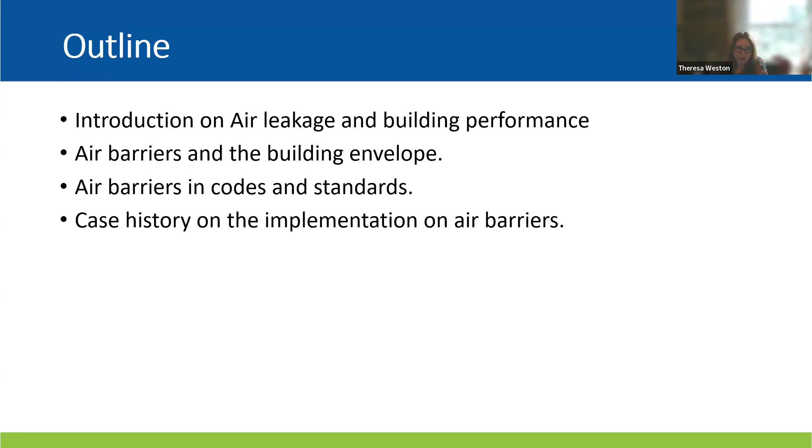Anyway, so what is air leakage? Air leakage is the unplanned, unpredictable, and unintentional airflow through, into, or out of a building. And for it to happen, it needs two things. It needs a driving force, so there needs to be a pressure difference across the building, and it needs to be a pathway. And in this case, we're talking about an unintended opening. The difference between air leakage and ventilation, say, is ventilation is planned. You are doing it for a purpose, and you're trying to control it. Air leakage is happening, and it may not be happening, or is most likely to be happening when you don't want it to happen.

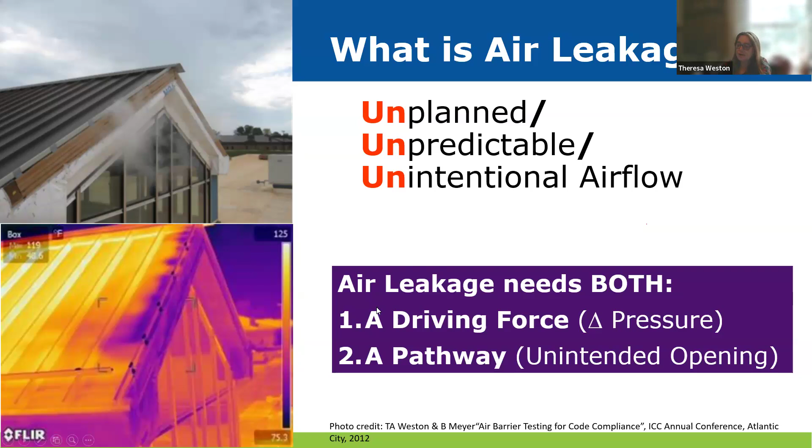And so I'll talk first about the driving forces. There are three driving forces on buildings that are the primary sources of the air pressure difference, which can drive air leakage into a building. There's wind pressure, and the size and shape of the building do control much of what the actual pressure is on a building, and you get both inward and outward pressure differences on the building, depending on how the building is exposed to the direction of

the wind. Then there is stack pressure, which is basically based on the building height and is the natural convection forces and the pressure differences from natural convection. And then mechanical pressure, which can be, again, a negative or a positive pressure on the interior of the building, and can cause air leakage to occur either inward, infiltration, or outward, which we call exfiltration, through a building envelope.

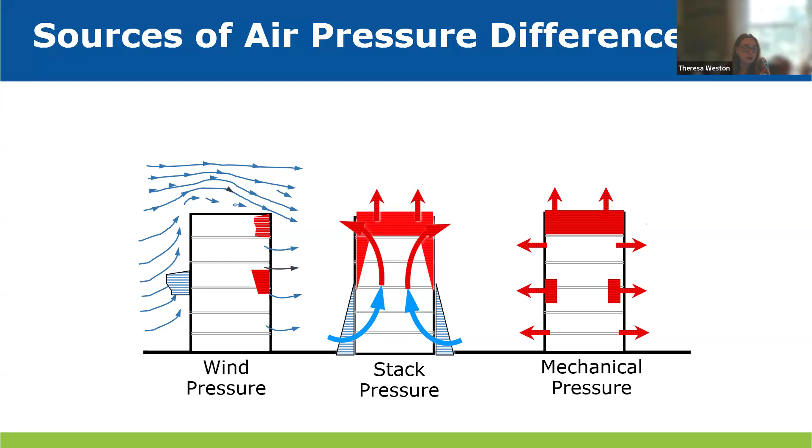And these three pressure differences can work together to cause a pressure profile across a building envelope at different places, and they can all cause air leakage, which can be unwanted, and I'll talk about what some of the consequences of that are. But before I do that, I just want to give you an idea of what the level of pressure difference is that you get from air pressure. From wind pressure, this is actually looking at the pressure versus wind speed. You can see it's not linear, but obviously when the wind speed goes up, the pressure differential goes up. Usually you're at a lower wind speed than what the testing is at.

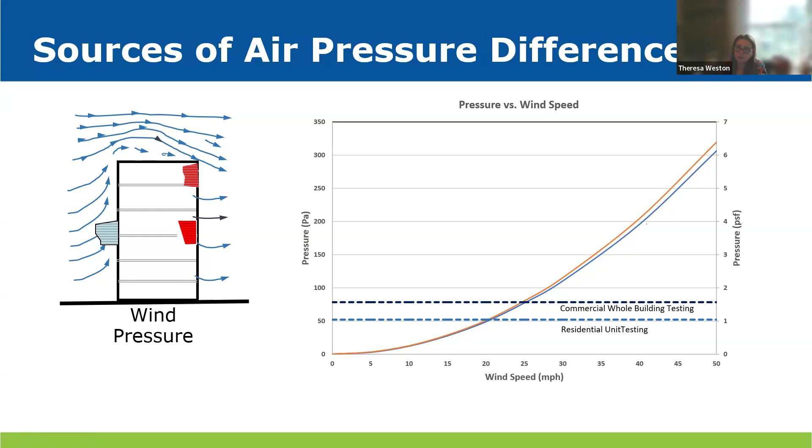Commercial whole building testing is usually done at a 75 Pascal pressure difference. And I will be talking more about how you do the testing later in the talk. And residential unit testing, where you're looking at testing an individual unit within a multifamily building, is usually done at 50 Pascals. And those have been just developed traditionally, and that is where we tended to get the most repeatable practical testing. Those are higher than the pressures that we actually see day to day on a building, but they are done to characterize the leakage within buildings.

If we look at stack pressure, I'm not going to go through the details of the equation, but just to know that the taller the building and the larger the difference between the interior temperature and the exterior temperature, the more stack pressure there will be. So if you're in a high-rise building in a cold climate, I know there's been a lot of studies on stack pressure effects on, say, high-rise buildings in Canada, where they have quite cold winters. You'll see a larger effect of this stack pressure than, say, if you're at the equator, where the inside and outside temperature are not that much different. And then it does matter on the height of the building.

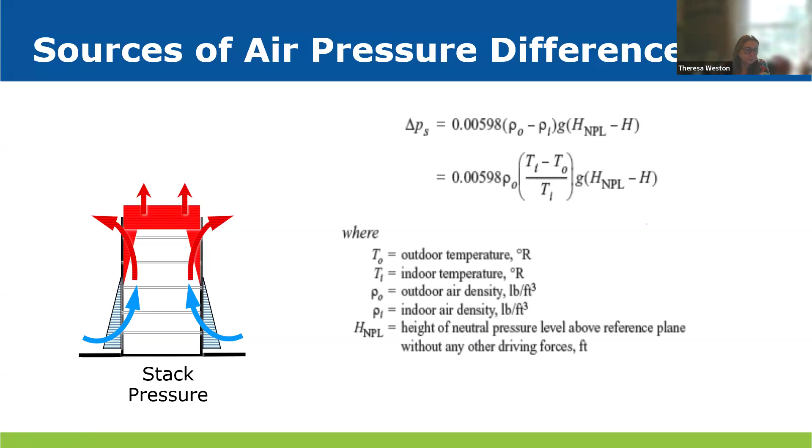And finally, mechanical pressure. Now, mechanical pressure is caused by mechanical systems that are not balanced, so that you're creating either a negative pressure or a positive pressure inside the building. And they can be quite extreme. It depends on the equipment and how you're running it, how well it's commissioned, how well it's working in there. This is some work that I did on a manufactured house. So these are small. It's a very small single family house building.

And what we did is we looked at the pressure difference from the interior to the exterior with a number of different mechanical devices in the house turned on, and all of these exhausted to the exterior. As those exhausted to the exterior, they depressurize the house inside. So with nothing on, we're close to zero pressure across the building. But then when we turned on the furnace, we went up, we turned on the range hood. This is the exhaust hood above a cooktop. Then we turned on an exhaust in the bathroom.

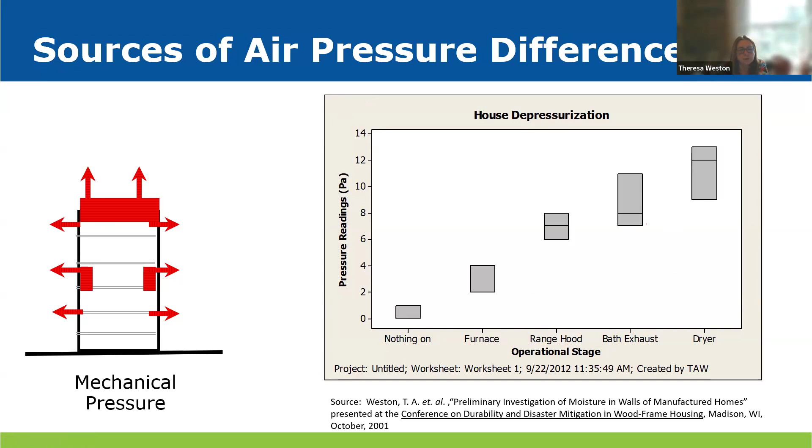So going now to the impact of air leakage in a building. So air, when it leaks, it transports heat. So obviously the air has a certain temperature and it is moving, so it's transporting heat. It also will contain a certain amount of moisture and will transport moisture, and then it may also contain contaminants, and so it may move contaminants with it.

And so when we look at the impact on the buildings, the heat will cause, we usually look at the air transport for heat and its impact in terms of the energy efficiency of the building or the load on the building to condition the interior, but it may also affect the comfort. We look at moisture and its movement.

We primarily look at if there's moisture in the air and it hits a cold surface, it can condense and cause moisture problems in the building and reduce the durability. But obviously, moisture moving into the building can also cause some issues with comfort and with energy efficiency. And I'll have some examples to do that. And then, of course, if you're moving contaminants into a building, it affects the indoor environmental quality of that building.

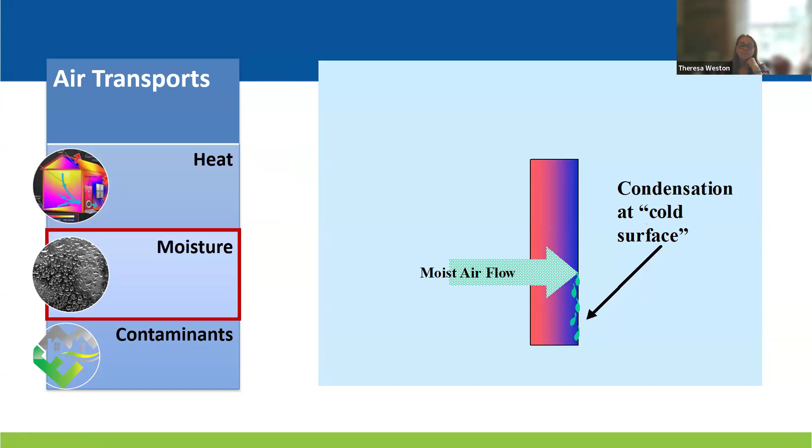And so although we spend a lot of time in codes trying to control things through vapor barriers and reducing vapor diffusion, if you don't consider the air leakage along with that, you are hurting yourself, because the air leakage just bypasses the diffusion barrier. So you need to consider the air leakage as well as the vapor diffusion when you are looking at moisture transported through a building assembly.

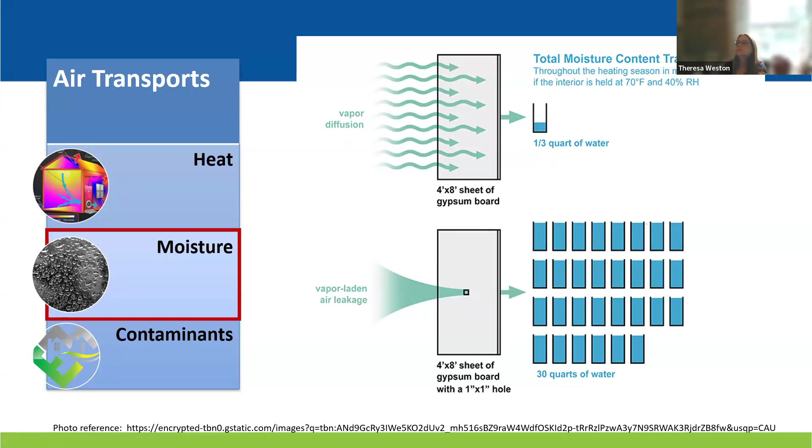And when you have air conditioning on the inside and hot, humid weather, you can move moisture through. It can hit a cold surface, and then it condenses, and once it condenses, it can cause things from rot in wood surfaces, to mold. It can cause corrosion in metal surfaces, a number of other harms, and hurt the durability of the building.

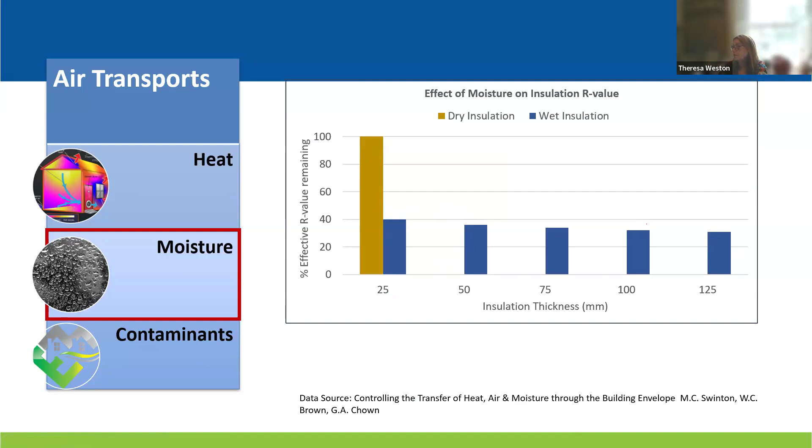Also, if that moisture were to go into your insulation and condense in the insulation, you reduce the insulation value because wet insulation does not work as well as dry insulation. Having more insulation when it's wet doesn't help you versus a good dry insulation. So you want to avoid moisture condensing within an insulation area as well, because that'll hurt the energy efficiency of that building.

Finally, if we look at contaminants, one of the areas where we've looked at it in North America is at the garage house interface.

And this would be the same if you had a residential building over a commercial space. Depending on what was in that commercial space, you may want to separate and stop the air movement from that commercial space into the residence, and keep the air quality separate between the two. We're also seeing a number of resilience issues.

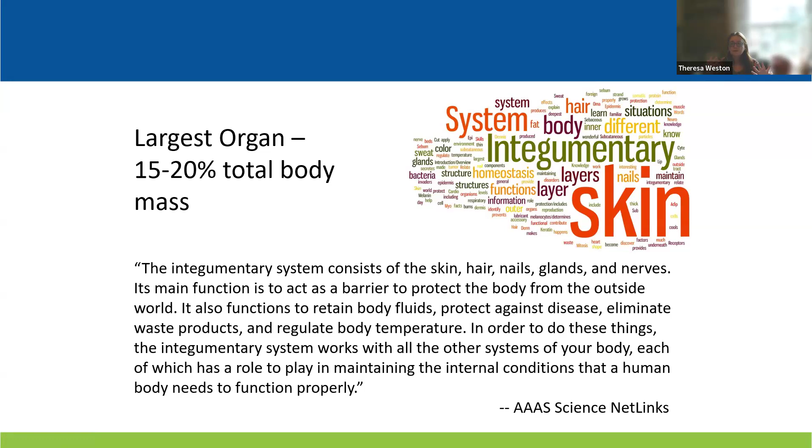And so we talk about this building thermal envelope, and air leakage is a critical part of establishing that thermal envelope or enclosure. It's analogous to the largest organ in the human body, the integumentary system. I always have trouble saying that word, which is basically all of the skin. And that's like 15 to 20% of your total body mass. Really, the building envelope is providing the same benefit to buildings that this system provides to the human body.

When you are establishing these enclosure systems, I do want to say that there's a lot of balancing that goes on, because the building envelope has a lot of characteristics and performance requirements that it has to meet. So we talk about energy efficiency, but it also has to be constructible. It needs to be able to be done on site effectively. We do need to handle water management, both in the liquid form from rain and vapor diffusion.

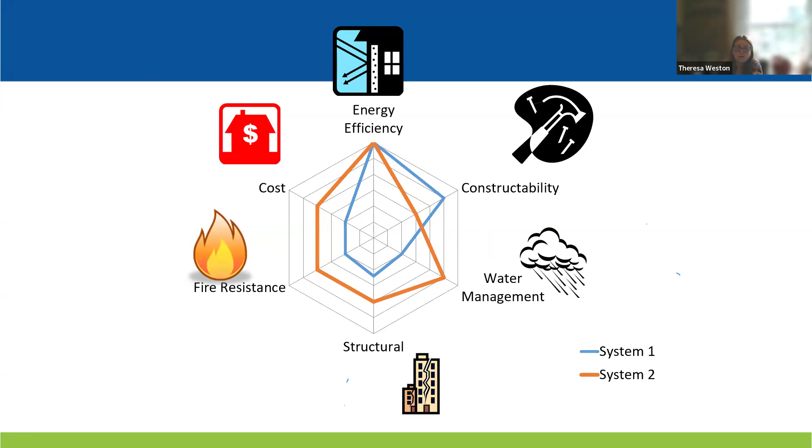And so you may get two systems that have equal energy efficiency, but they may be different in some of these other aspects. So you need to look holistically at your design, but air leakage is always a part of that design. And so we want to look a little bit closer at where air leakage occurs.

And sometimes when we specify a sheet material, we don't realize that the seams in the sheet can let air leakage go through. It is harder to see the air leakage going through materials themselves, but with things like fiberglass or rock wool insulation, air leakage will go through there. They're porous materials, so you will get air transfer through there if they are not built adjacent to an air barrier.

This is a materials test where a square meter of material is laid, a pressure differential is put across it, and the amount of flow across at a given pressure differential is measured. An assembly, whether it be a wall or a roof assembly, is tested pretty much the same as the material, except we actually build it to scale.

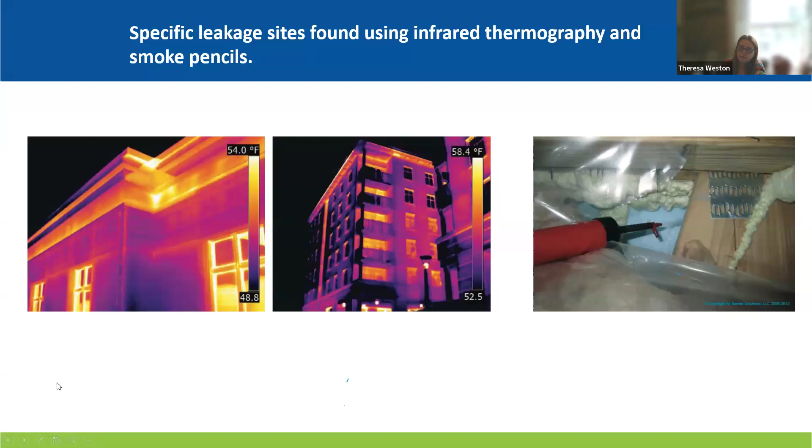If you want to find out more about these, there is e-learning available through ASTM on a number of the test methods mentioned. I think there's a cost included in it, so I'm not trying to do a commercial for it, but there are also some YouTube videos available to see how these programs actually work.

So I'm going to quickly go through where we have air leakage in codes and standards. Air leakage is not uniformly considered in all codes and standards, although it has effects on durability, energy efficiency, and indoor air quality. It is not included uniformly across codes and standards.

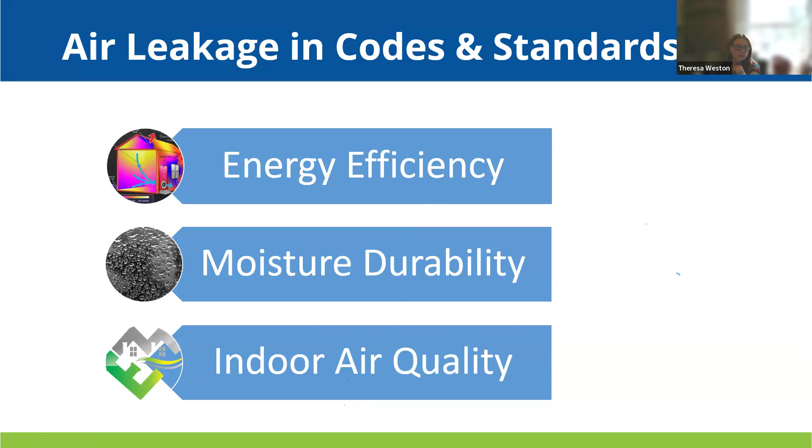So when you look at energy efficiency, air leakage is included in the Energy Conservation Code, IECC, and ASHRAE 90.1, as well as in ASHRAE 90.2 and ASHRAE 189.1, which is the technical content for the International Green Construction Code. This is where air barriers and air leakage requirements are the most evident. So we put a lot of time and personal energy into the development of the 90.1 and the IECC requirements, because that is where it is most regulated, and this is within the U.S.

codes. In Canada, air leakage was actually regulated for moisture before it was regulated for energy efficiency. So this is somewhat of a country-specific requirement. In moisture, within the ASHRAE codes, we do consider it as part of moisture durability, and the requirements are within ASHRAE 189.1. We actually have one requirement, but it affects energy efficiency and moisture durability, and it also affects indoor air quality. And then there are some areas about air leakage considered within ASHRAE 62.1 and 62.2, both minimums and maximums within those for good air quality.

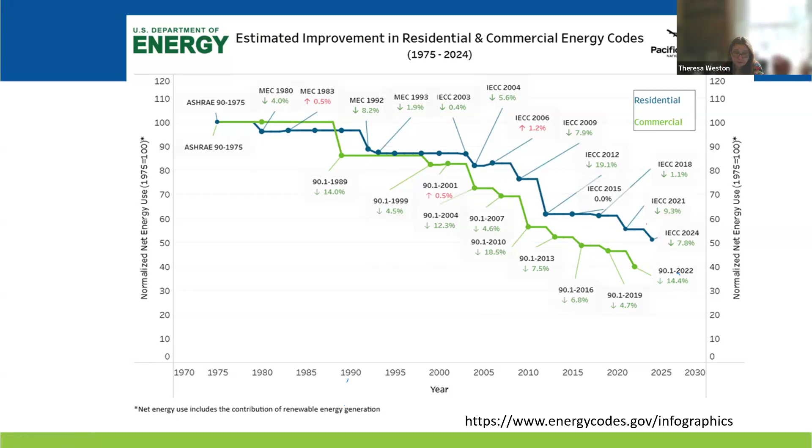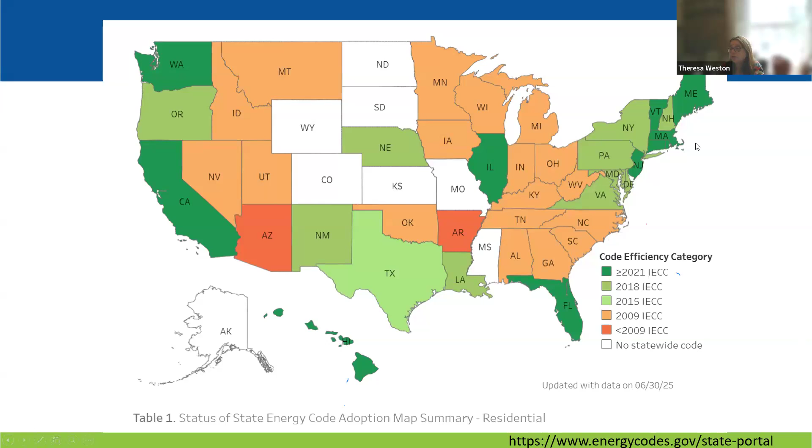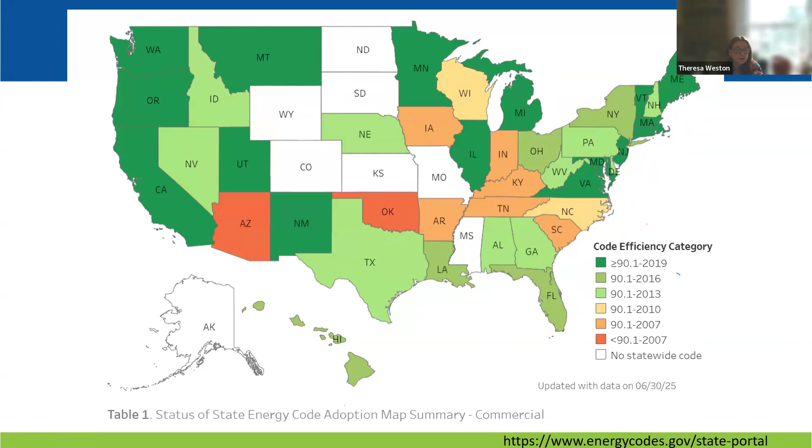So you can see from year to year, edition to edition, you get a different level of efficiency. And this is where code adoption comes in. This is our residential code adoption. And you can see that within the US, different states adopt at different rates, and the same is true for commercial. So we do have wide-ranging regional differences in what our requirements are based on state, because of what they've adopted or adopted with amendments within the US. But all of them, when they get to the field, need to be implemented. We actually need to implement in the field. And so how do we do that?

How do we implement the air leakage code compliance, which is, of course, part of the building envelope code compliance? We have a maximum air leakage allowable with a whole building air test. That's one way that we look at compliance. That has been a fairly recent introduction into the codes. We do verification of tested materials and assemblies, and then verification to make sure they're installed correctly. Whole building air testing, and then with the advent in the most recent codes of adding energy credits.

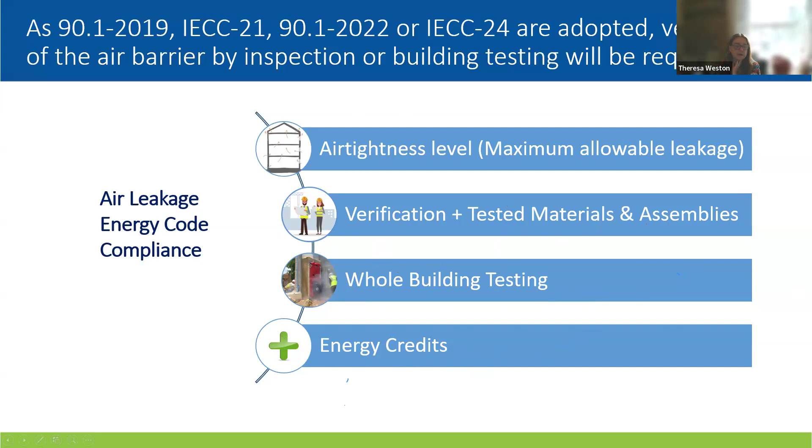So you have to meet a baseline prescriptive and then get a certain number of credits, where you get to pick from a table the number of credits that you want. Getting air leakage into those energy credits actually aids you in doing whole building testing, looking at the air tightness level and trying to improve it. So what are the code requirements? I'm going to go through this fairly quickly because these are the US code requirements.

As I said, ASHRAE 90.1 is a federal minimum, but we also have an International Energy Conservation Code, commercial section, which follows 90.1. So they are in pairs. They're not exactly the same, but they're in pairs. A lot of states will adopt the International Energy Conservation Code, and as long as it is at least equivalent to the current version of 90.1, it will meet our federal requirements.

Residential is the residential part of the Energy Conservation Code, and by residential in this case, I mean single-family dwellings and duplexes, 3 stories. So these are small. Any large residential, any multi-family apartment buildings, condominium buildings, etc., would be under the commercial code. And depending on your building profile within a country, most of your residential might actually end up being in the commercial code. So I'm going to just go through.

As I said, they're paired. So the ASHRAE 2016 is included as part of the IECC 2018, 2 years later. These are just a series of charts showing how this has advanced over the last 10 years. I'll just highlight a few of these things.

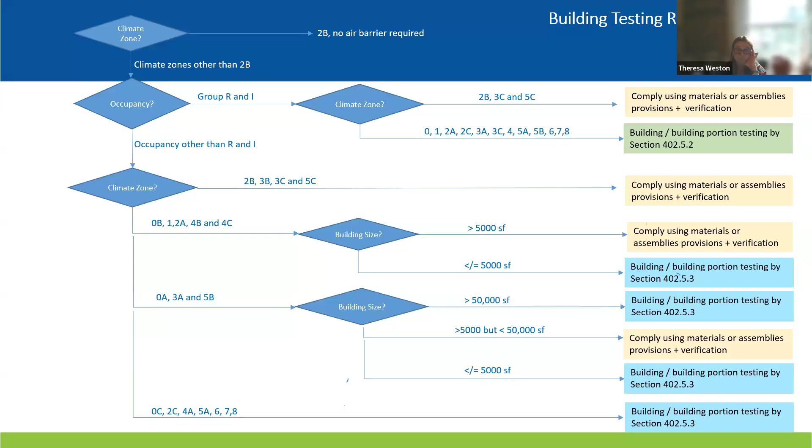This is actually not quite as complicated as it looks for a given jurisdiction, because in a given jurisdiction, you're only in one of the climate zones. For a given state, you're at the most maybe 2 or 3 climate zones. So it does compress down as you look at it more locally, but we have a wide range of climate zones across the United States. So it was fairly complicated when you had to look at the whole United States.

The most recent 2022, although ASHRAE 90.1 will be releasing 2025 this year, did require whole building testing on buildings less than 5,000 square feet. The IECC 2024 parallel code again allowed multifamily buildings to test by dwelling unit, but it also had different whole building testing requirements, with a much more simplified climate zone and square footage requirement. And then 2024 also had energy credits for air leakage, for enhanced air tightness.

ASHRAE 90.1 2022 does not, but I sit on 90.1, and as I look into the future and the latest, we will have some energy credits for enhanced air tightness in the 2025 standard, I believe. It's not final yet, but I believe they are going to be in.

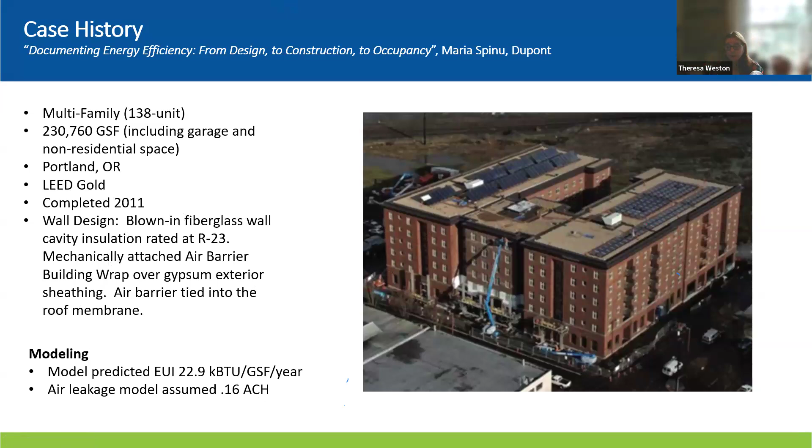They had the design of the building envelope. Again, we talked about reducing the load on the building in the beginning of this talk, by building a good envelope and considering the air barrier and the interconnections in there. Then it's really important, and one of the keys to this being a successful case history was the involvement of manufacturers in the design and construction team doing mock-up wall testing to make sure the detailing was done correctly.

I mentioned air leakage can occur through a material, but it can also occur in an assembly or between assemblies. And so making sure that the interface transitions and penetrations were taken care of appropriately, and mock-up wall testing is one of the best ways of doing that. And so that was done to get that correctly.

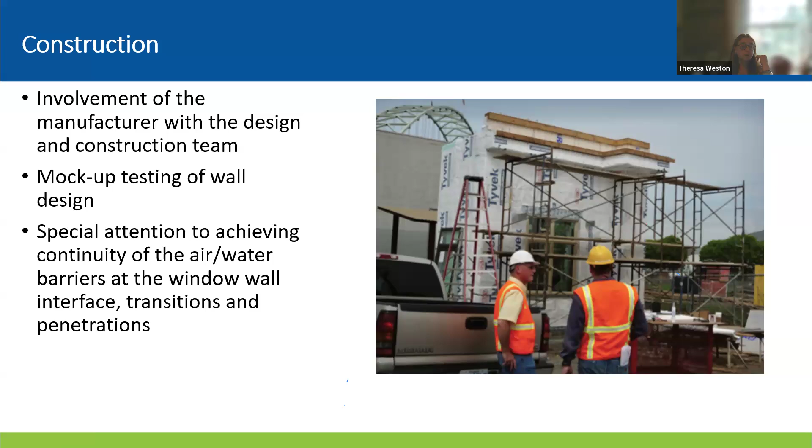And when they did the post-construction testing, they got to 0.22 CFM, which is significantly less than that 0.40, which was what was sort of in the codes at the point this was built. They got 0.14 air changes per hour infiltration rate on the units they sampled separately from the whole building air leakage. It was tested as part of an ASHRAE research project. And when they did post-occupancy evaluation, the EUI actually came in less than the modeled.

So it was about doing the design with an energy efficient loading, and using energy efficient mechanical systems, but also doing that construction verification during the construction, making sure that you had involvement in understanding the design of the interfaces as well as the construction of the interfaces. So I think I've reached pretty much the end of my time with you.

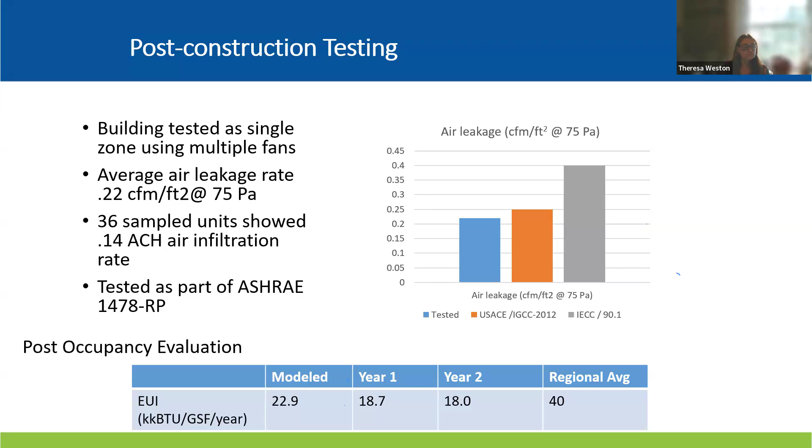So just to summarize, air leakage is unplanned, unpredictable, and unintentional airflow. Air leakage can transport heat, moisture, and contaminants, and therefore affects the indoor environment and the loads on the building. And the primary codes regulating air leakage are energy codes. They're ASHRAE 189, ASHRAE 90.1 in the US, IECC, or other energy codes in other countries, obviously.

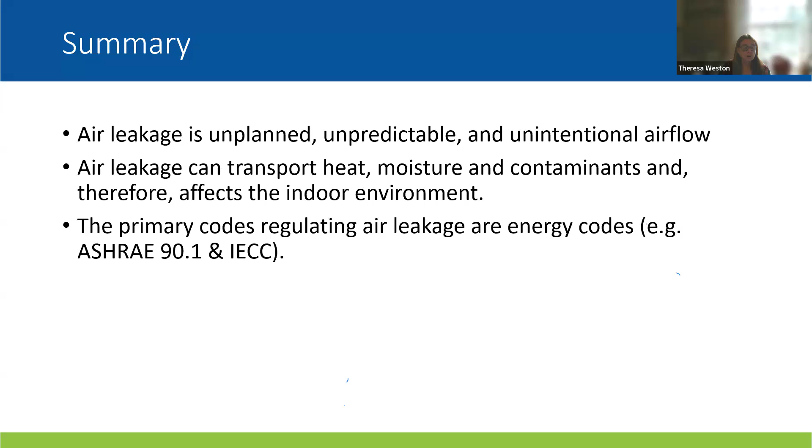And just some final thoughts. The building envelope or the building enclosure is a critical system to building performance. There are interactions between air leakage and mechanical systems performance. So air leakage sort of bypasses some of your mechanical systems. So it's really important to understand that and how mechanical systems can actually cause more air leakage as well.

Energy standards and codes are continually improving, and continuing to stay up with the most recent version is really necessary if you want to move forward with energy standards. And verification is one of the key things in actually achieving the performance that you've designed.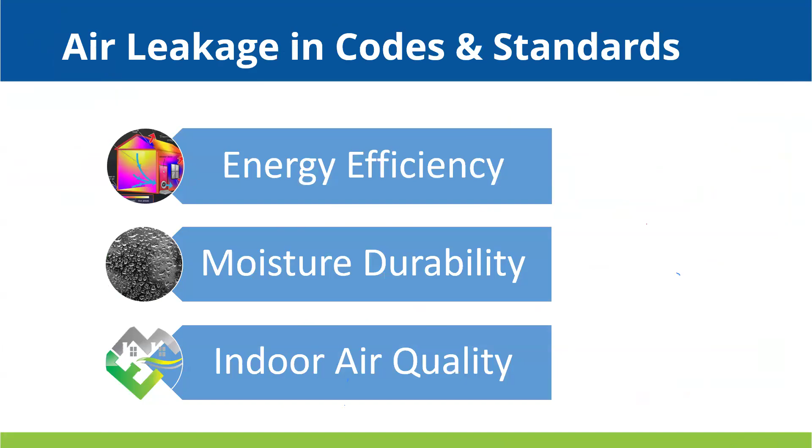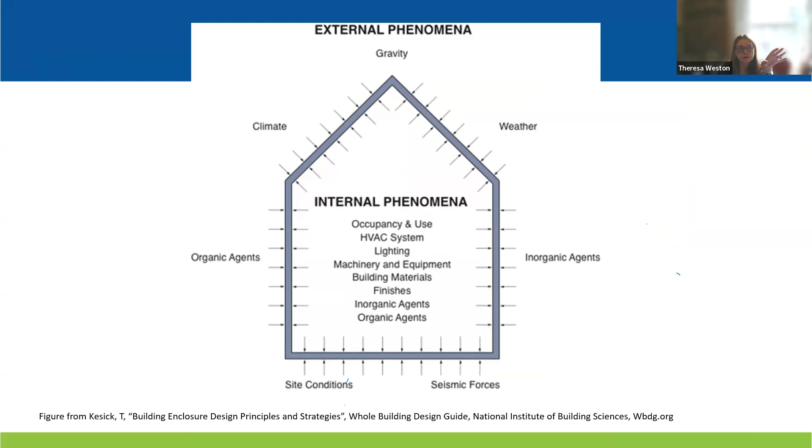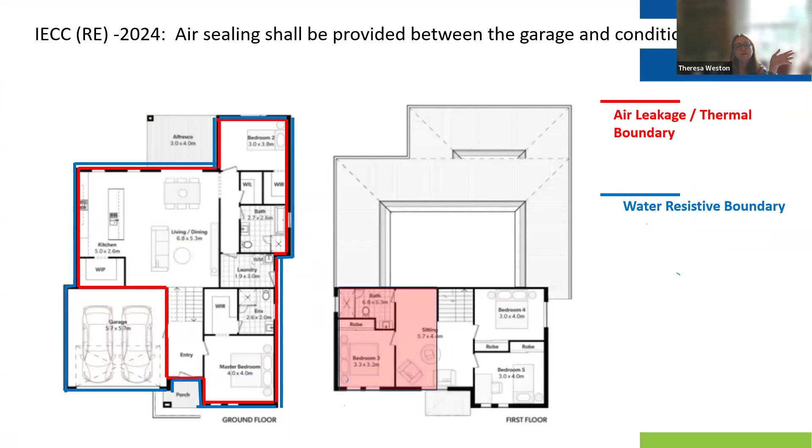While I'm doing this, I will say that I have heard of certain rooms, like clean rooms, keeping a positive pressure, so that you have parts of a building, a laboratory space or something, keeping a positive pressure, or doing a pressure differential to make sure that nothing comes into a special use room. So I think that people have done that. It's sort of a caveat to my previous answer.

The cities are regions, and when you give this in the U.S., everybody knows where they are. Miami is very hot and humid. It's down at the tip of Florida, south. Phoenix is hot, dry. That's desert. St. Louis is in the middle of the country, and it has hot, humid summers and fairly cold, wet winters. It's actually not a particularly pleasant combination.

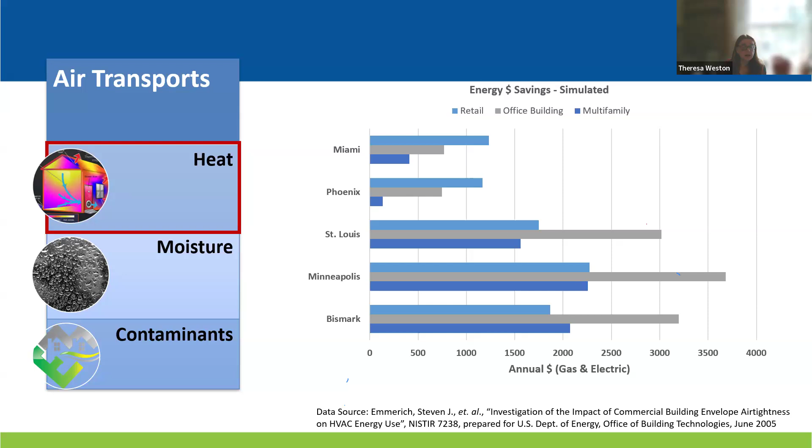A question will be from Mr. Moinuddin again. One more question regarding the sliding doors, awning windows, or some other glazing. What is the minimum air leakage value that should be considered? Oh, on a sliding door. I don't know if I have that in here.

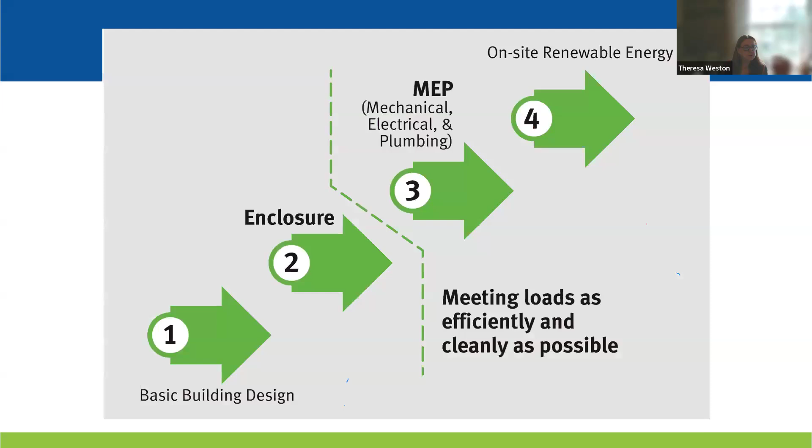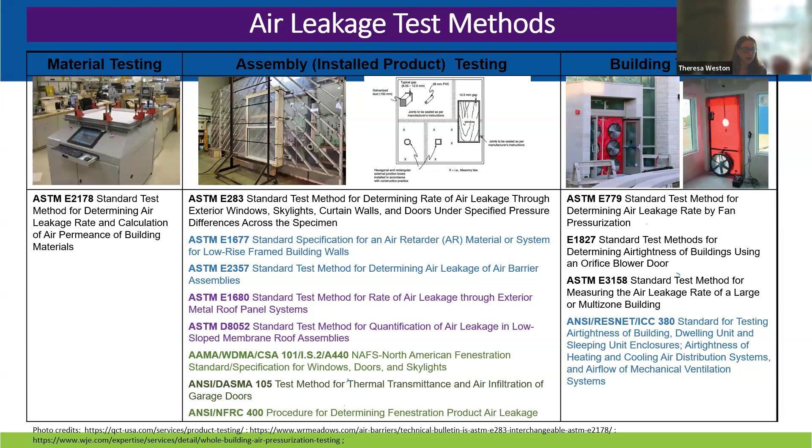There are requirements. Sliding doors, as with any other fenestration, are tested under these test methods. The DASMA is a door method. AAMA/WDMA is like a sliding door, glass door test method, and there are specific requirements in different codes for those assemblies, and I would need to bring them up, but there's actually a very direct table where you can look at that within the codes, and I can get back to you on that if you want to send me an email to ask what that is. I don't have it in my slides, and I don't have it memorized.

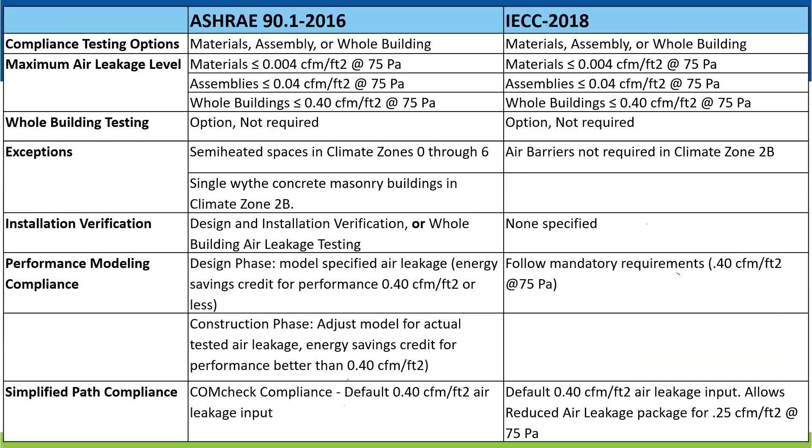Okay, I'll send an email maybe tomorrow. Yeah. Although I am speaking to you next week, so maybe I can pull that up and bring that up.